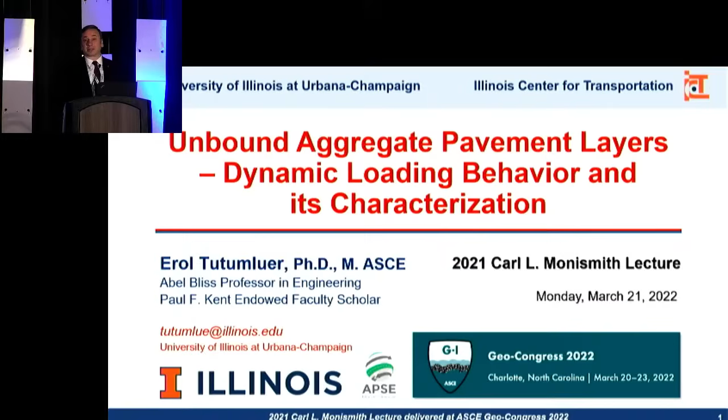With that, it's a great honor for me to stand in front of you and to present the 10th Carl L. Monismith Lecture Award today. Indeed, especially it's important for me to be here in front of you after Professor Carl Monismith himself, in 2012, presented the first lecture. This is the first time at a Geo-Congress venue that I'm actually presenting this award.

And you will see that I go back to my roots in geotechnical engineering with close ties. Those close ties really relate to some of the shallowest foundations of pavements, as unbound aggregate sub-base layers, which is something I've been working on since I started my PhD work at Georgia Tech. I really owe it to Geo-Congress 2022 for allowing me to actually present this lecture award at this time. Thank you again to the organizers, and thank you to the technical committee for nominating me, as well as the board of directors with Geo-Institute.

I do a lot of pavement work I will talk about today, but I'd like to also mention to you one logo on this title slide, which is the Academy of Pavement Science and Engineering, established with the goal to educate, to give higher education to people, to make them realize that pavement science and engineering is a field we need to learn more about, because, again, it is the shallowest foundation after all.

And from that perspective, I've done a lot of work with Illinois Center for Transportation, and you will see that my slides will come up. So let me switch to using this right here, hopefully.

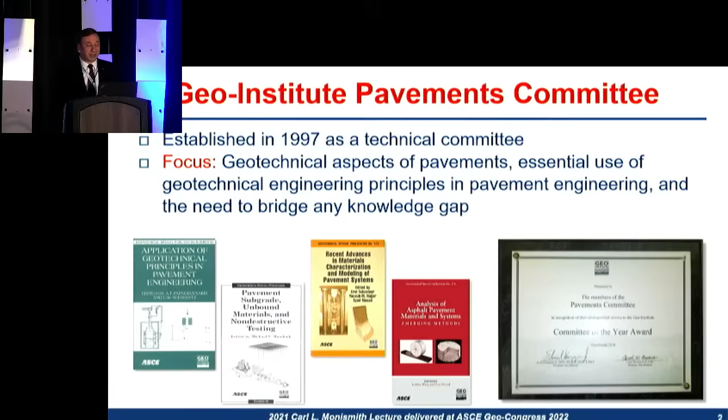I think we've been quite involved in doing things. Even in 2010, the committee won the Committee of the Year award, which I was very happy to have during my time chairing the Pavements Committee.

Another thing that made me extremely proud at that time, towards the end of 2011 or so, was when we established for the first time a named lecture, the Carl L. Monismith Lecture series in pavement engineering here by the Geo-Institute.

Professor Carl Monismith is a legend in our field. He's a distinguished member of ASCE, a National Academy of Engineering member, and served on the faculty of Berkeley, University of California, more than 50 years. His first talk on the Monismith Lecture was exactly on flexible pavement analysis and design, a half a century of achievements.

So he's the one who pioneered the mechanistic approach to flexible asphalt pavement design. I was there in that moment because with two other colleagues, Professor Tom Papagiannakis and Professor Chuck Schwartz, I indeed worked hard to make that award possible during that time. It's such a proud moment now.

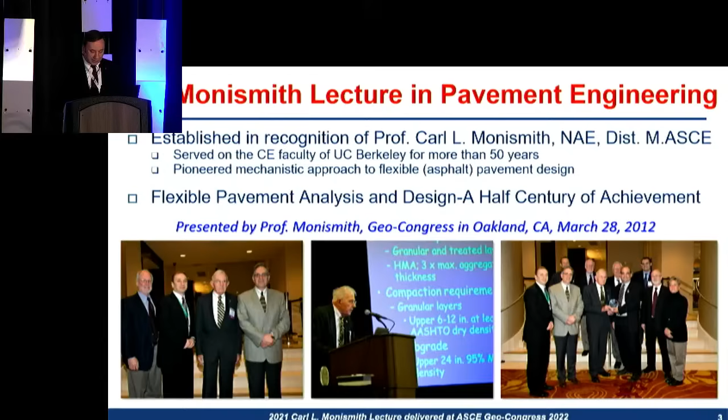I'm giving you this lecture because I was there to listen to Professor Monismith's lecture back in 2012 at the Oakland Geo-Congress event. It was a fantastic lecture, as expected, and especially students Dr. Gary Hicks and Dr. Rita Leahy were very influential in bringing and getting the support for his lecture establishment. I would like to mention that. So he's certainly a legend, and he was the person who gave the first lecture in this series in 2012.

Just a quick look at deserving, highly accomplished people and legends in our field of pavement engineering. Professor Bob Lytton from Texas A&M gave the second one. Professor Marshall Thompson from University of Illinois gave another; many of you know him very well.

Professor Matt Witczak, another legend and name in pavement engineering, unfortunately passed away just a couple months ago. That was a tragic loss, and my heartfelt condolences to his family and friends. He gave the fourth one from Arizona State University. The fifth was given by Professor Dallas Little, again another deserving individual from Texas A&M University. I introduced him actually at that Chicago event, I remember.

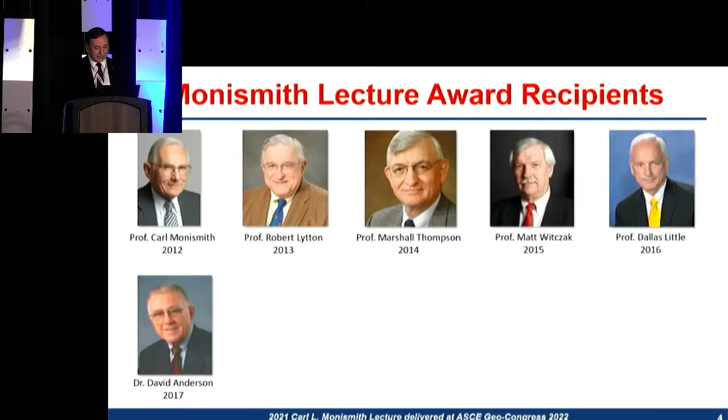Dr. David Anderson from Penn State, who's done a lot of work on asphalt, especially Dr. Gary Hicks—I will mention about him again, a student of Professor Monismith's. Tom Papagiannakis, University of Texas San Antonio. And finally, the last one was given by Professor Chuck Schwartz of University of Maryland.

Now I'm giving the 10th one, and we already have an 11th one for 2022. Eyad Masad, Professor Masad, is here with us. He's also from Texas A&M Qatar University. We're looking forward to his presentation next year.

A little bit about myself. I said I have strong geotechnical engineering roots and background here. Indeed, I did all my PhD work and graduate studies at Georgia Tech. Dick Barksdale, Professor Dick Barksdale, was my advisor, who was actually a student of Professor Jerry Leonards', another legend in geotechnical engineering at Purdue University.

And even going back further in the academic family tree, Professor Ralph Fadum, who was there for a short time, was also an advisor of Professor Jerry Leonards', who moved from Canada to study at Purdue at that time. But eventually Dr. Ralph Fadum was a professor at North Carolina State, right here in this state. And he had education received from Casagrande and Terzaghi at Harvard University. So really, that puts me in that chain, and I'm very proud of that.

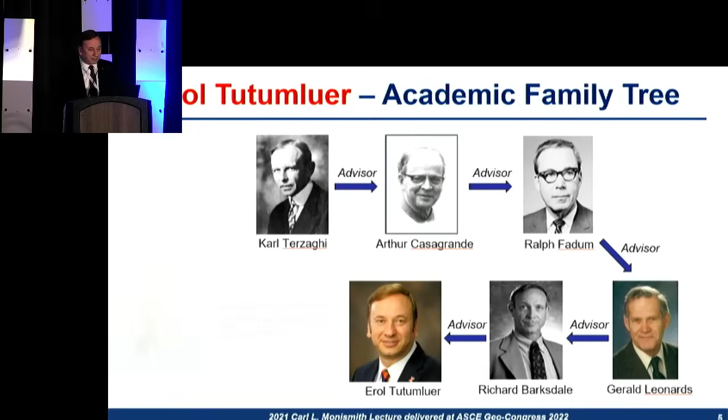The moment that I first attended in 1994 as a grad student, my first Transportation Research Board meeting, that was a really life-changing moment for me, because that conference is when I met for the first time Professor Carl Monismith, that's what really got me into academia. I can tell that was really the moment for me, yes, I want to do more of this, doing research and studying and educating students. So that's why I have to mention it.

After 2012, I went on the international front, and I became chair of the Transportation Geotechnics Committee affiliation and related work with the ISSMGE. Since then, I've been serving as the chair of Transportation Geotechnics Committee, TC202, under ISSMGE.

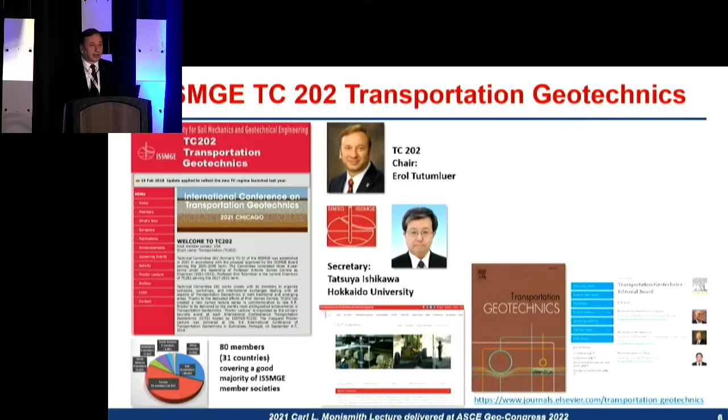As part of that, we started a new journal in 2013 on transportation geotechnics. I think it's got into the citation index, and it's really making some good impact to our profession and engineering field in transportation geotechnics. I was also the person who organized what unfortunately became a virtual conference, meant to be in Chicago back in May 2021, and that was the fourth ICTG. I know we have an ISSMGE conference coming up in May.

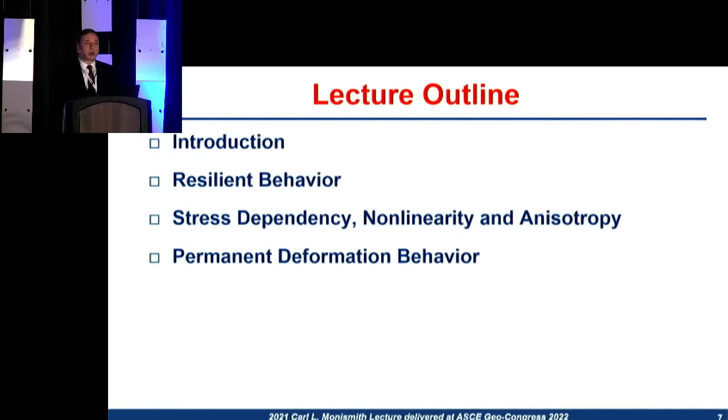So without further ado, let me get into my primary technical topics. I would like to bring to your appreciation some of the important facts and challenges we deal with in pavement engineering. My title has to do with dynamic loading, repeated loading, and vehicular traffic loading, and indeed what that does to our foundation materials and pavement materials, and how we take into account their resilient or elastic behavior and permanent deformation behavior by understanding proper advanced characterization of their nonlinear, stress-dependent, and anisotropic behavior.

All the things that are supposed to be there for doing a proper job analyzing pavements, the layered pavement system, moving wheel loads, not currently emphasized but very important. I will get into those aspects, you will see. And nowadays, more and more recycled material use, sustainability challenges, climatic effects, and resiliency, how we can build pavements to last with the aspects that we want to preserve resources.

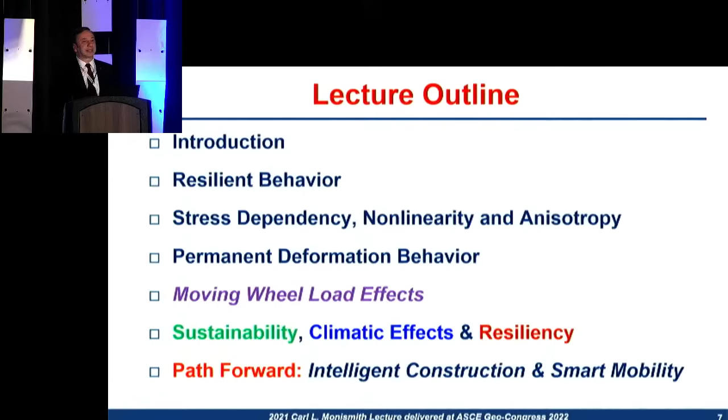Path forward, we're getting more into Mobility 4.0, you've probably heard about that term, intelligent construction, smart mobility, and I will also give some highlights about those towards the end.

To start with, have you ever thought about why Roman roads lasted that long? They built about 53,000 miles of roads 2,000 years ago, and about 360 miles of roads still exist today. When you look deeper into that three to five feet thick Roman roads, you will find different sized aggregates put together to build a road, a lifeline that we drive on nowadays.

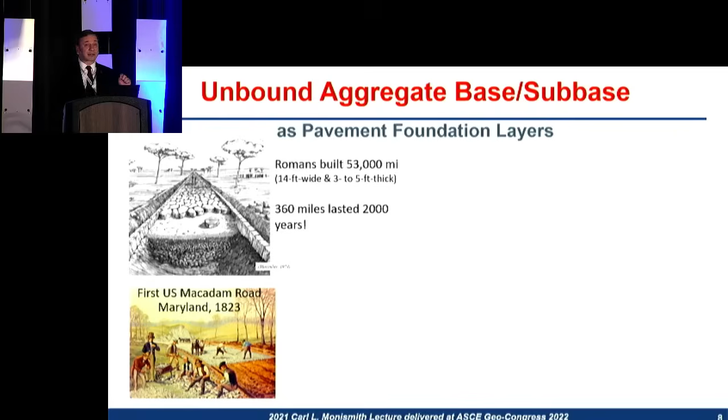The same thing was the case when the first macadam road came to the United States in Maryland in the 1800s, right here. Same thing, see how they're incising and putting rocks together. These are the aggregates, our stone skeleton infrastructure materials, building blocks.

Recently, in 2013, we did an NCHRP, National Cooperative Highway Research Program, synthesis on unbound aggregate pavement layers, and it was quite interesting. As expected, over 90% of flexible pavements, these asphalt surface pavements, have granular layers. This number goes up to 70% in the case of rigid pavements, meaning we built with unbound aggregate layers, as you see from these statistics, all the time, except for some of the high-type pavements. More than 90% of the 4 million miles of roads in the United States will have these unbound aggregate layers.

Understanding their behavior really helps us build long-lasting pavements. That's how throughout the activities of the Pavements Committee over the years, starting from the late 1990s, we put emphasis on geotechnical aspects of pavements. This is a Geostrata article from 2016 that Drs. Barry Christopher, Chuck Schwartz, and I co-authored, which shows the AASHO road test many of you are familiar with, and unfortunately, many of you are familiar with that cookbook formula that comes with the structural number equation. There's much more to pavements than that, believe me.

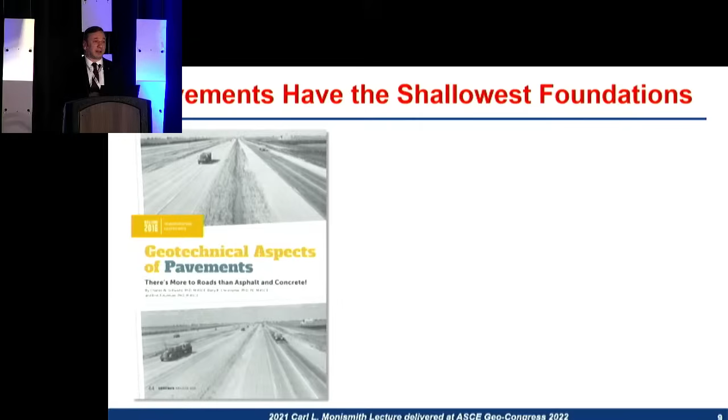It is not an easy thing building pavements. In fact, when you think about multi-layered pavements, just like a conventional flexible pavement you see here with the typical unbound aggregate base and subbase, and how to make it both drainable and packed, optimum packing with large or small or different sizes of particles to distribute the load, how to make that actually last. We are indeed, as pavement engineers, designing something to fail in a certain number of years. You don't do that in any other job, you don't build a steel structure to fail, to kill people at some point, right?

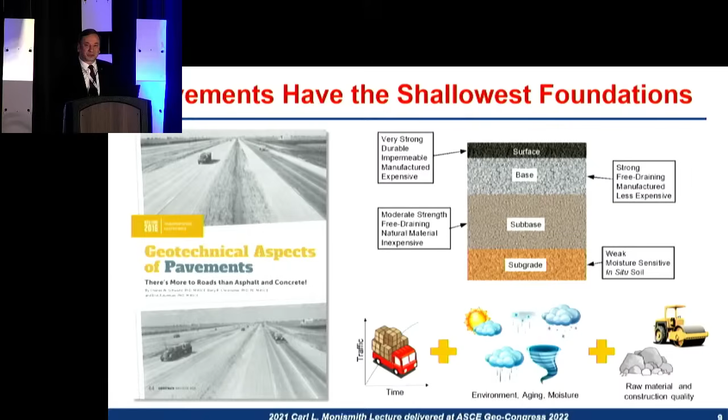Roads are failing on a certain time frame, they have a time life basically. It's really challenging when you think about the dynamic loading aspects, the climatic conditions, environment, moisture and temperature changing on you all the time, and of course the construction aspects, hoping that you're constructing what you designed.

Flexible pavement is an asphalt surface pavement. Load distribution in those aggregate layers is very important. Modulus, stiffness, resistance to permanent deformation, all those things you have to pay attention to under a dynamic loading scenario when you're constructing them.

In the case of rigid pavements, these are often jointed concrete pavements and slabs. The slab action, the slabs are very stiff, maybe an order of magnitude stiffer than asphalt concrete surface. So more the focus in unbound aggregate layers goes to some of the moisture affinity and drainage aspects, looking at their moisture, whether or not they're susceptible to moisture effects, the suction potentials, their hydraulic conductivity properties. That's what we should be paying more attention to.

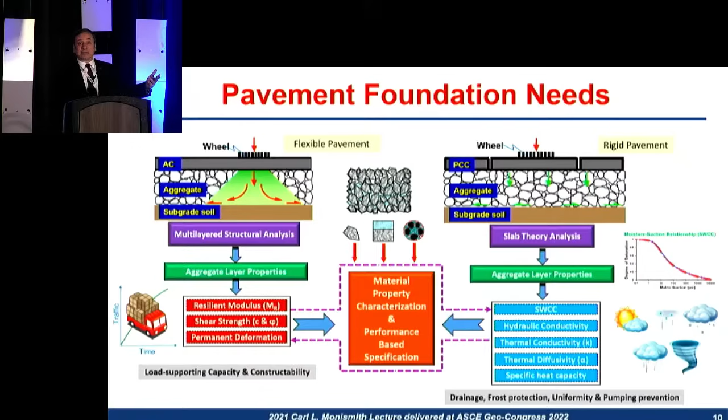That all comes back to these particles put together as unbound aggregate layers, an assembly, which just like our soils have three-phase material, voids, how much of the voids filled with water. We need to be engineering these such that eventually the roads will perform and not deform and not rut, and they will still be able to freely drain and all those aspects. So it's really a challenge.

And in all this, the design objective is the surface that you're driving on is still supposed to provide for you a smooth, safe and durable riding environment. That's eventually the design objective.

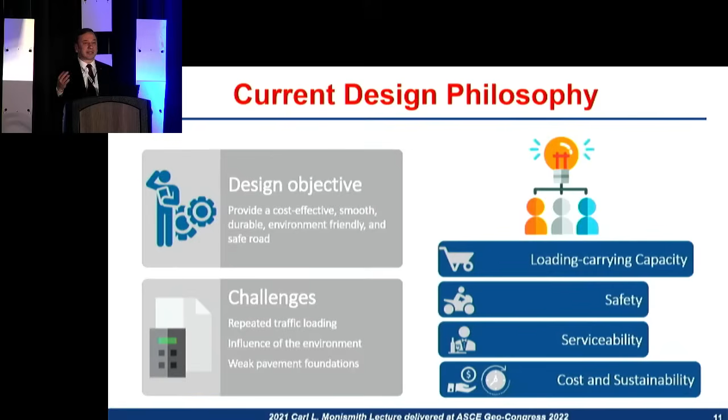But don't forget about the challenges of constantly moving vehicular loads, sometimes heavier than what is expected on a certain road, the effects of moisture and temperature and seasonal changes, as well as extreme events we'll talk about, weak pavement foundations—that's where we come in. Again, load carrying capacity, safety, serviceability, more and more these days sustainability aspects, and the permanency, resiliency that comes with life cycle cost estimation into the picture.

Most of the time, when you remember the empirical AASHTO equation, the structural number—that's how everything goes back to the 1960s AASHO road test, but so much has changed since then. So we need to really design multi-layer pavements by understanding the mechanisms about how they deform and how they fail. And understanding those mechanisms requires the right inputs: the traffic loading, the climatic factors, temperature, moisture regimes, as well as the construction aspects.

We need to bring them all together. We need to solve the multi-layer structure, how the various layers coming together are going to take the load, and what are the responses? Usually stresses, strains, deformations—these are pavement responses.

What is a critical pavement response that's going to cause cracking, that's going to cause rutting? Which layer is rutting? You need to understand these mechanisms to eventually relate them with the number of load accumulations, how damage accumulates. These are distresses like alligator cracking, fatigue cracking, or roughness of the pavement surfaces, or rutting in the wheel path.

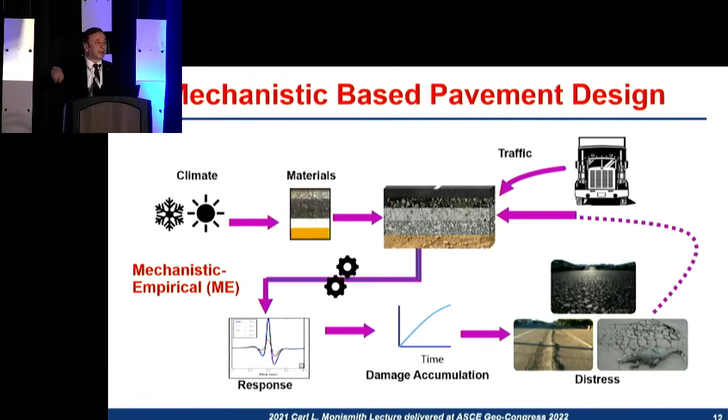And this is a process we call mechanistic empirical design as the state of the art. We need to really understand this. Well, understanding this and perfecting this really relates to going to a level that you need to characterize the right stress states.

You need to apply the right kind of loading scenarios and conditions in the lab on your samples and specimens you test and analyze. That's the lab testing level.

You need to do field trials. Well, field trials will not probably complete so many truckloads, so much traffic that you will accumulate in the 20-year design life of that pavement. You need to actually accelerate that performance period, maybe doing accelerated pavement testing in the field, full-scale construction of those pavements, and the modeling, the right modeling by understanding the mechanisms. So that's all what's needed.

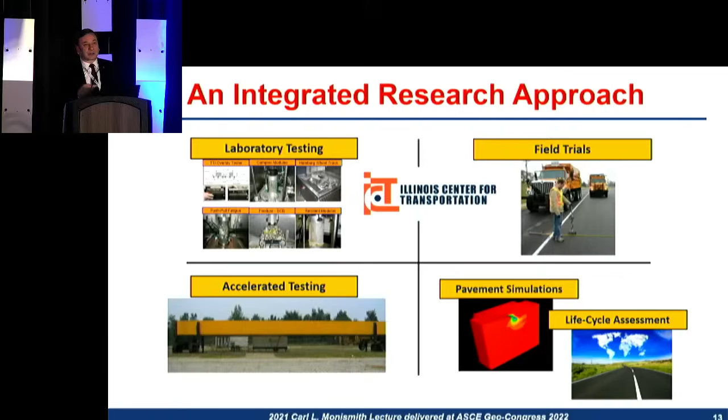In all of this, of course, performance is a must. It must be satisfactory to come up with your guidelines and specifications for construction.

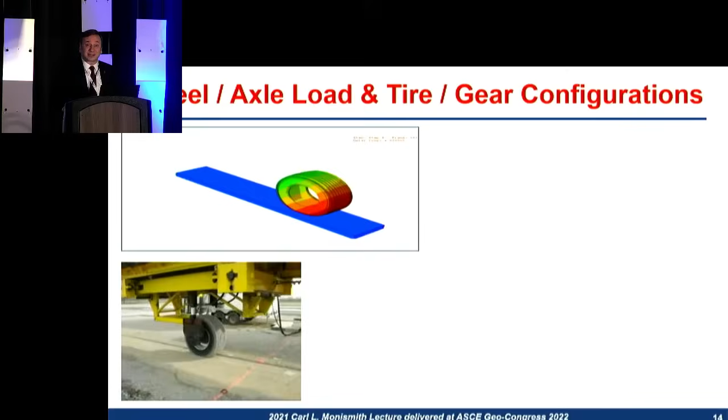Now, think about this as a single wheel traversing over, in this case, an aggregate layer. Often these are construction platforms, and understanding the type of contact stresses in the vertical direction, longitudinal, transverse directions. And what if you go from a standard dual wheel or single wheel to a wide base tire? What are the implications of those on a pavement surface?

And this is just a single wheel. Think about it now.

These are 13 vehicle classes of the Federal Highway Administration. These are all the different trucks, buses, cars, all the vehicles you see out on the pavement, right? How do you take this into account? How do you accumulate traffic? How do you look at effects?

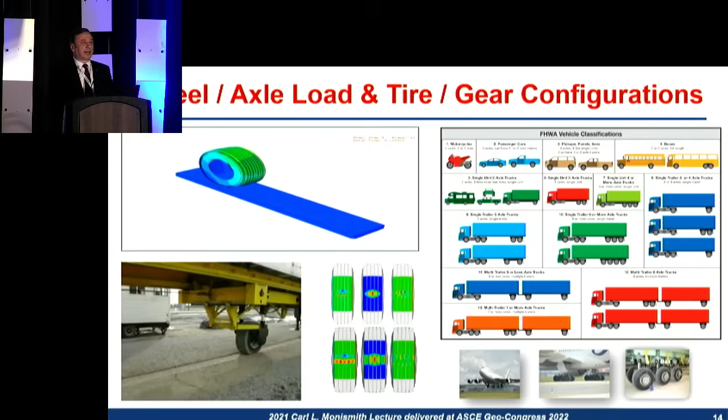The same thing is in the case of airfield pavements. How do you look at closely spaced many wheels, actually applying a very heavy load from that wide-body aircraft? Really challenging. And all in all, again, this is a moving wheel load aspect.

So nowadays what we do is, some of you may have heard this, weigh-in-motion stations, usually in states. That's where they collect the data, and that easily goes back to a mechanistic empirical design approach where we take into account every single axle and the load coming from every single axle wheel arrangement. That's how axle load spectra are established.

But there are other things that we have to worry about on the surface, from the point of road alignment, pavement friction, hydrodynamic forces that affect the vehicle control, and how all of that comes into that vehicular stability. So there are things that are really complicated dynamic loading. It's not earthquake loading, but this is another dynamic loading, right? We are challenged here in geotechnical engineering, pavement geotechnics.

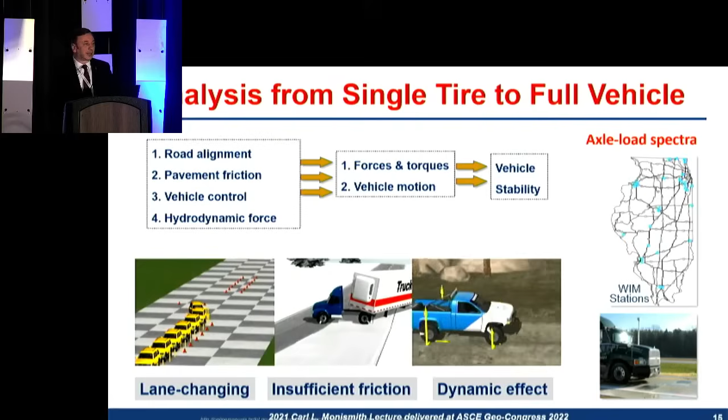So in all of this, state-of-the-art goes to your three-dimensional finite element programming. Professor Al-Qadi, my colleague, director of ICT, does a great job taking into account some of the really advanced topics. For example, viscoelastic properties of asphalt, characterized properly in the lab. I joined with him by actually looking at base and subgrade materials from databases like long-term pavement performance studies. But looking at where the rubber meets asphalt.

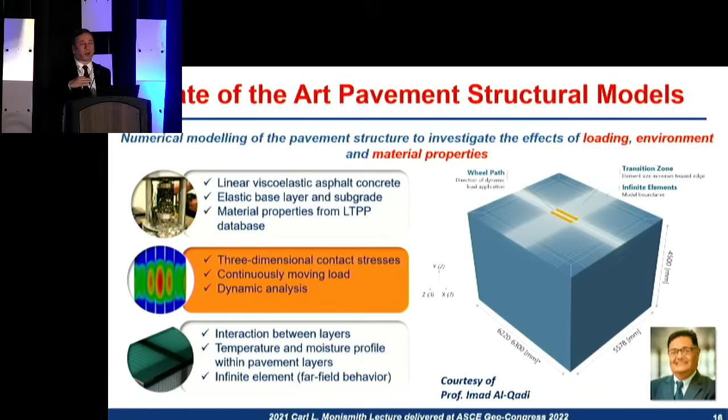Exactly, we need to understand that contact stresses, moving load effects, how load is transmitted, and how multiple layers are interacting with each other, any delaminations, any interface stresses. Of course, all those things we assume perfectly bonded and perfectly fine, perfect conditions in most of our analyses. But again, that's something state-of-the-art.

When you come and look at the aspects of under that surface course, under that asphalt concrete, flexible pavements, low to medium volume roads, thick airport pavements with thick granular layers, always load stress distribution is the key, as I mentioned before. And load has to be distributed because subgrade is the weakest component. You want to protect it, right? That's the whole idea. So layer modulus is a design input.

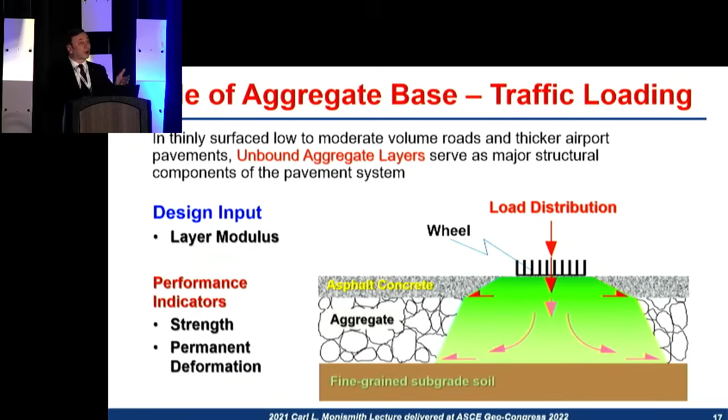That's how you solve for pavement responses. Strength and deformation need to be there because that road and that unbound aggregate layer should resist the effects of multiple repetitions of a certain truck passing on that road. Again, dynamic loading aspects. Let's get into the shallow foundation domain and understand the typical stress states under a wheel.

We're very familiar with this. There's an overburden load right on that, and if you look at a certain soil element or aggregate element in that base course, typically you are confined in a confined medium, but not a lot of overburden we have. The only thing that comes as dynamic is usually that wheel loading.

If you put the wheel right on top, there are things you can do like jump up and down the wheel, but that's not the fact. Wheels are moving in nature, but somehow there is some dynamic impact loading that may take place. You need to take into account all of those things.

That's how the repeated load triaxial tests are designed to evaluate dynamic traffic loading effects on typical triaxial specimens, which as geotechnical engineers we commonly run these tests on. But this is different from a cyclic loading test because in between the different wheels, axles of a truck, you have some wait times, rest periods. So that's why it's called a repeated load. We always have a rest period in between, waiting for the material to bounce back. And indeed, that's very important, that bouncing back.

This is the only video that I think I have not worked very well. The material, the specimen that you see in the picture is supposed to be going up and down with the wheel passing on top. That's exactly the recoverable deformation or the unload behavior, the elastic deformation.

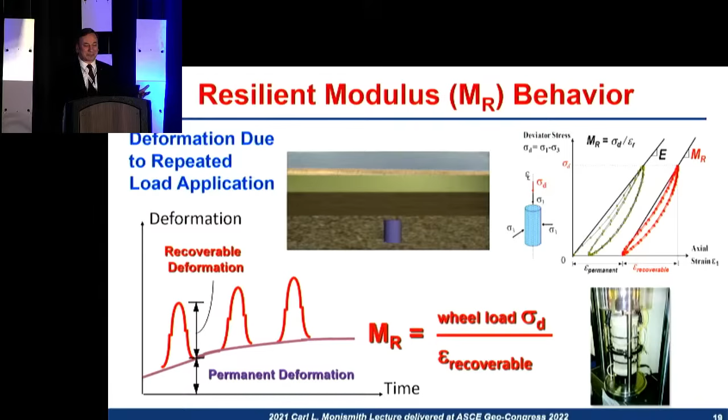There's a permanent deformation that's accumulating in time, and you can clearly see that on the lower left picture. You want to make sure to accumulate that up front before you open the road to traffic during construction. That's the idea. But anyway, dynamic loading, deviator stress divided by recoverable strain, that's your modulus.

We typically run the AASHTO T307 test in the US to get this, and this is basically the resilient modulus test procedure that came out of the Strategic Highway Research Program protocol. Also, NCHRP study 1-28 brought us some special aspects that Europeans are already using, which is taking into account moving wheel load aspects.

With a moving wheel load, you get variable confining pressure conditions. The load is moving already, the load is not stationary. So as I differentiate these triaxial setups, if the cell pressure is constantly applied, that's a constant confining, versus variable confining would represent a moving wheel.

Typical standards, the European CEN norm for example applies that, and other countries in Europe can apply that too. We need to be doing more of that. Whereas in the US, from a 2013 synthesis, we found only 4 states run even the T307 procedure in their DOT labs. So interestingly, it's just the T307 or the 1-28A.

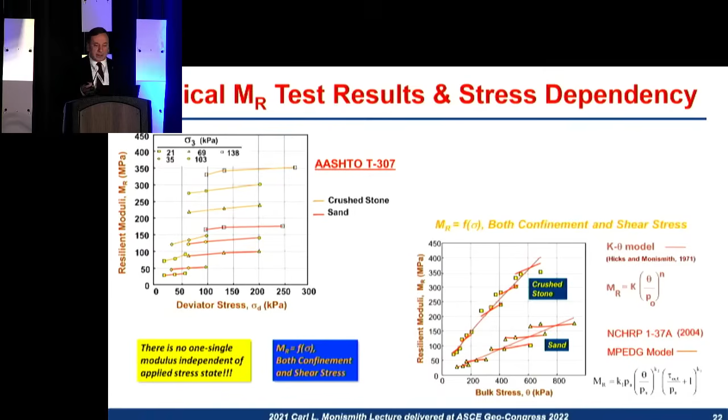Actually it's both dependent on the confinement, or we call it first stress invariant bulk stress, as well as the repeatedly applied wheel load stress. So clearly this aspect was first picked up by Professor Carl Monismith and Dr. Hicks in their 1971 paper, and this is the very well-known K-theta model.

But in addition to that, Professor Jacob Uzan and others came up with the effect of the deviator stress that should be taken into account here as well. And eventually this formed into a 3D stress space, the MEPDG model as we call it. Tau octahedral stress was included into this model, and that's the work of Professor Chuck Schwartz. This is the famous MEPDG model that came into the Pavement ME AASHTO design, supposed to be a level 1. So that's the stress dependency we're talking about that we need to take into account in our analysis.

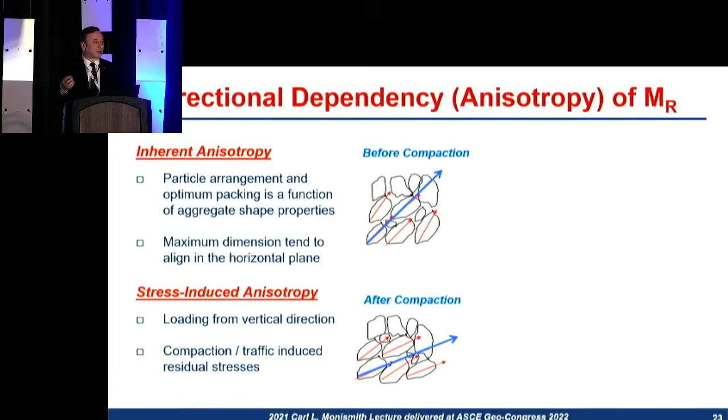The second thing that's most important, and over the years we found this to be truly important - my early work at Georgia Tech, we started looking at that in my PhD - aggregate materials, granular materials, accumulating in the vertical direction, sedimentation, think about it. They're already having some of the longer dimensions oriented in the horizontal direction. That's what we call inherent anisotropy. But imagine the compaction and vehicular loading coming always in the vertical direction, that's further causing an anisotropy, related to a stress-induced anisotropy.

If they're independently controlled, you can come up with any kind of dynamic stress state, typically under a moving wheel. Or you can just cycle in one direction and test the material, then change the pulsing direction completely on a compacted aggregate specimen, which you should.

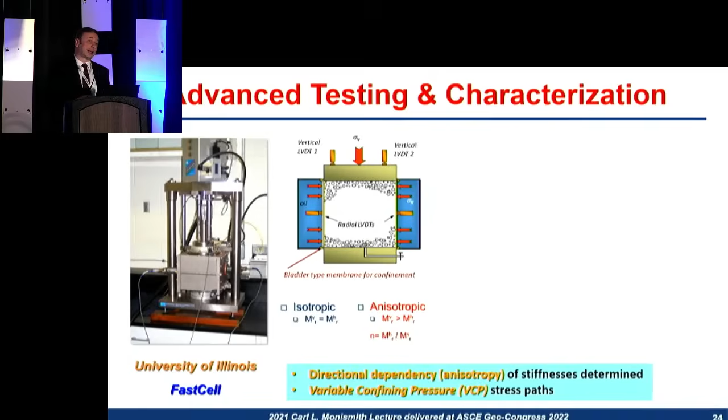Professor Jerry Leonards, early in his career, was able to orientate specimens 90 degrees to look at anisotropy in clay samples. But with unbound aggregates confined, you can't do that, so you need to switch the stress states around. That's exactly how we were able to test for anisotropic modulus properties. That's what this device allowed us to do.

It also allows us to apply various dynamic stress states under a moving wheel load. We call it variable confining pressure stress paths and stress path testing. All these things are important.

First on anisotropy: in 1999 we looked at the first aspects of switching the pulsing direction on a specimen, running isotropic stress strain equations. Whichever direction you're pulsing from, if the material was isotropic, like a neoprene rubber specimen we tested, it's not stress dependent, and from either vertical or horizontal pulsing it gives you a constant modulus.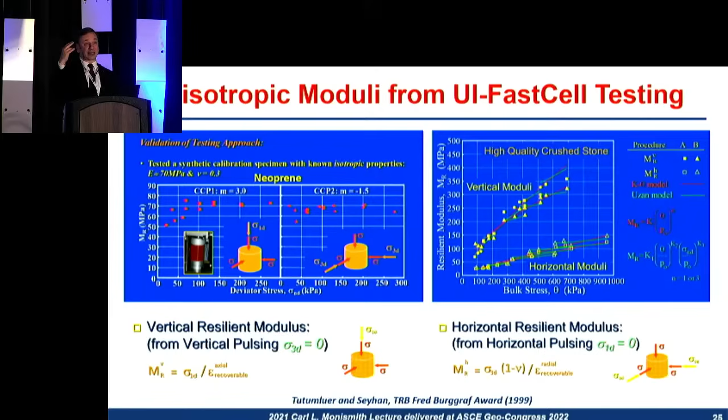That's a perfect material, rubber. But nothing like that is our aggregate materials, especially compacted out in the field. There's always a higher modulus attained in the vertical direction than the horizontal direction. The horizontal to vertical modulus ratio is the anisotropy we always talk about, and this is something we proved.

Further work on that—I was really fortunate to work with two great lecture award winners, Professor Bob Lytton and Dallas Little, whom I respect utmost. Our work through the International Center for Aggregates Research brought out aspects of the stress dependency for the vertical modulus, and in addition, how we were able to characterize this anisotropy of the modulus.

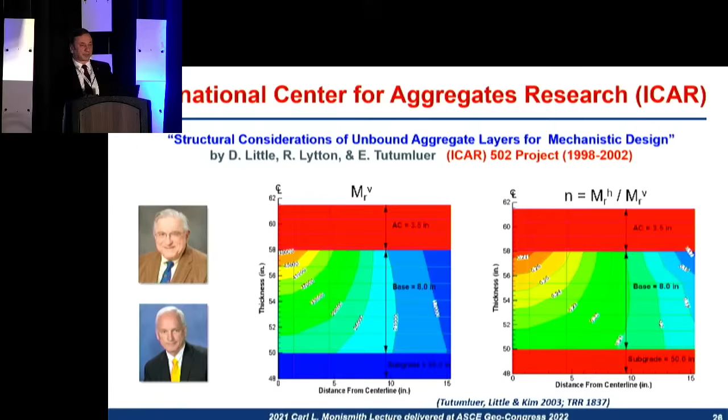Typically about a quarter of the vertical modulus, we found, stress dependent, in the horizontal direction. If you take into account the proper anisotropy of the material as it's compacted, then it's possible to do a much better prediction of pavement responses in your analysis.

Some proof of this: Professor Stokoe from Texas went to a Morgan County haul road, a quarry road that was constructed, and did seismic testing measurements on a constructed aggregate layer, vertical versus horizontal. You can clearly see that. This was published back in 2003. Vertical is higher as constructed in the field.

Professor Eyad Masad, with family members who worked on this, analyzed the AASHO Road Test data for some of the measured deflections to match our models—should it be anisotropic, or isotropic, giving us the best results? When he tried isotropy, not really—measured versus predicted don't match on the 45-degree line. When we go all the way to horizontal modulus being 30% of vertical, that's when we get the match.

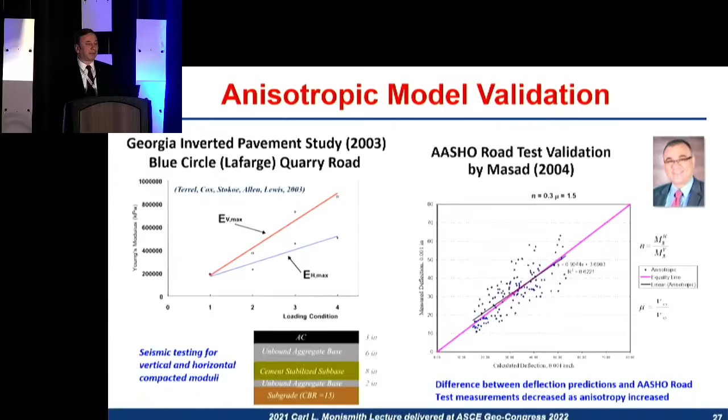This is something from actual field data as validation of the anisotropic behavior. Further on, in 2007, we did similar validations with test sections we constructed at Illinois, with different thicknesses of base courses tested under moving wheel load conditions of ATLAS, with 170-plus instruments put in as strain gauges and LVDTs for deformation measurements.

If you look at those individual responses collected and predicted from our analyses—this is Dr. Kwon's work, really—you can clearly see that predictions with the anisotropic assumption work much better across several of those pavement responses predicted at once. If you can match so many of those at the same time, that tells you you're probably getting the mechanics of how pavement is deforming. So this is really a great indicator.

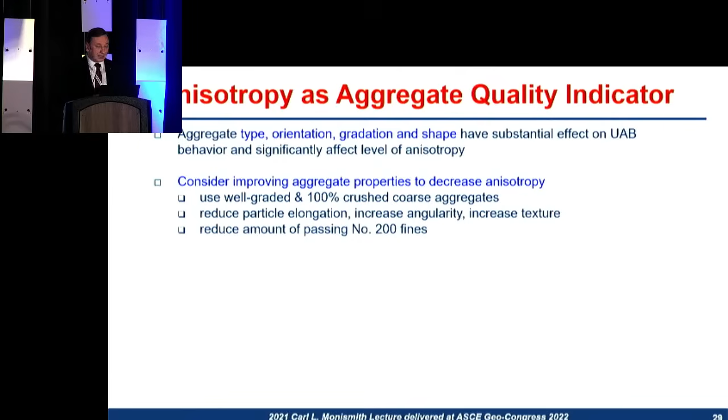From that perspective, anisotropy is certainly a quality indicator. We've told this to aggregate producers, construction managers and site managers on how to select their aggregates. As aggregate material gets better quality, with more crushed material and better gradation of optimum packing, dense graded, you can clearly see that N number, the horizontal to vertical modulus ratio, goes up towards isotropic, making the material stronger. What that does is affect critical pavement responses, such as the strain at the bottom of the asphalt responsible for fatiguing of the asphalt.

Vertical strain or vertical stress, wheel load stress on top of subgrade, controlling subgrade rutting - these are all actually coming down as the anisotropy is getting better. That means the isotropic assumption is not conservative, by the way.

This is really something we use all the time. There are effects of percent crush and percent fines on the modulus. As you get higher crush versus uncrushed material, crushed material usually interlocks better and gives you much higher modulus - that's what you see on the left-hand side. On the right-hand side, you're seeing how much fines passing the number 200 sieve should be in my dense graded aggregate base.

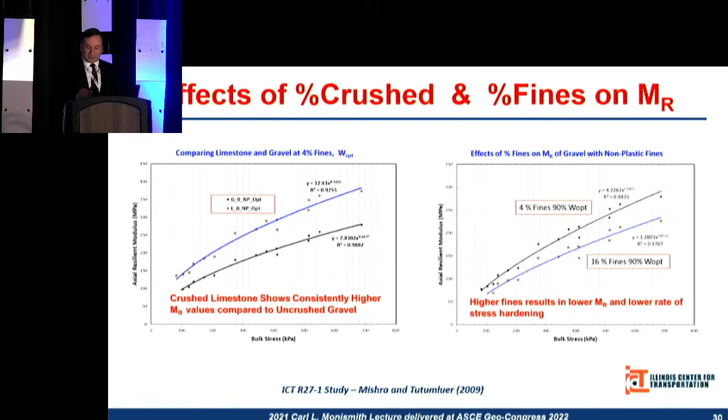Very important question. When you start increasing those fines, you start to compromise the large aggregate contact and the skeleton, the stone-on-stone contact, right? You can clearly see that modulus also goes down with excessive fines, in this case up to 16% fines. Now on the crushed aspects, crushed versus uncrushed, or rough surface texture versus smooth surface texture.

Two decades of my work, including Professor Masad's work here, we looked at how we can quantify with indices from imaging, image analyses, aggregate shape properties - instead of saying angular or subangular, how can I come up with an angularity index, how can I come up with a surface texture index? This is the aggregate image analyzer developed at the University of Illinois that can do that for you. Why is quantifying important now?

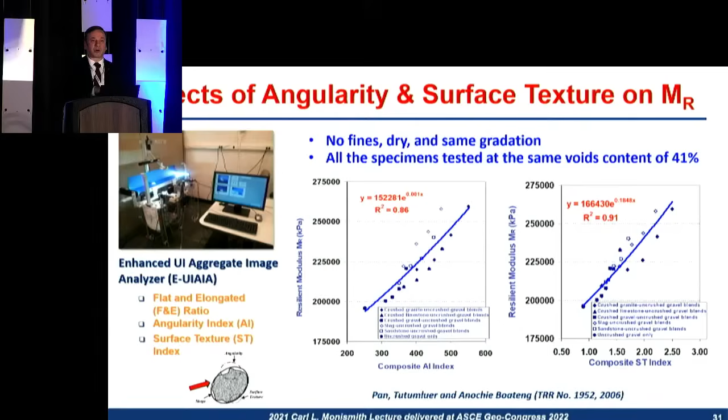Because you can relate it to modulus, permanent deformation, some of these aspects. You can clearly see that resilient moduli here is shown as a function of a composite AI angularity index or composite surface texture index of different blends of crushed and uncrushed materials. You can clearly see that as you go higher in angularity, as you go rougher in surface texture, you're always increasing your modulus. It does a better interlock.

Now let's come to moving wheel load topics. A state-of-the-art facility constructed at the beginning of this millennium is the Federal Aviation Administration's National Airport Pavement Test Facility, where they can put actual gear loads of wide-body aircraft, like a Boeing 777 or 747, and test full-scale pavement test sections.

When we looked at some of the data, I was fortunate to be able to analyze some of their data and look at the results, using all the different theories to predict the stresses and all that. How does that compare to what current test procedures allow us to characterize modulus, right?

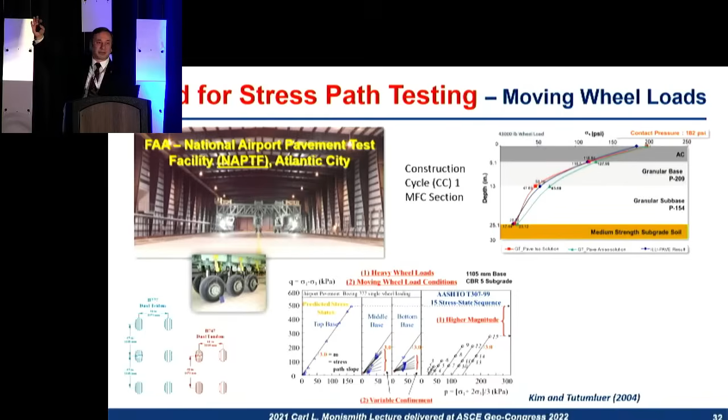First of all, heavier loads like gear wheel loads of aircraft are very high. If you look at the middle portion, showing the middle or the bottom of the base, you see not exactly a stress path slope of 3.0, which happens to be constant confining, but a variable confining, because moving wheel load aspects are important. Actually, that NCHRP 1-28A is probably the best in that case.

And surely, you can bring those aspects together in a moving wheel load scenario where you see, when the wheel load goes around, that the wheel load is not changing the overburden, but according to the dynamic loading, you see the orientation of the principal stress axis. And approaching and departing loads - think about how shear stress reversals are happening and how those have detrimental effects.

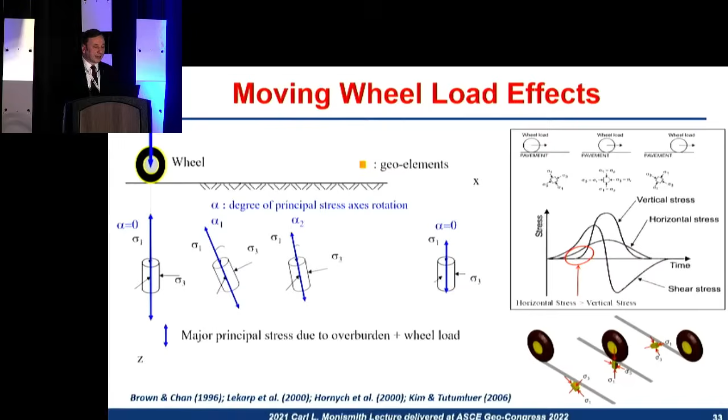Extension, compression, extension type loading. Many people have shown this over the years, and we need to take this into account - the principal stress rotations, through stress path testing.

You can do this by actually pulsing in different directions on a specimen and come up with the right stress states - all the way from just pulsing in the vertical, what we call the stress path slope, Q over P about 3, constant confining, to going pulsing only in the horizontal direction. FastCell-like devices or resonant cell can help us with doing this.

Why is it important? Simply, all the compression type loads that you see on the positive axis, the Q axis here, are given moduli often much higher than the extension states. Extension states are realized during a moving wheel load. Remember that.

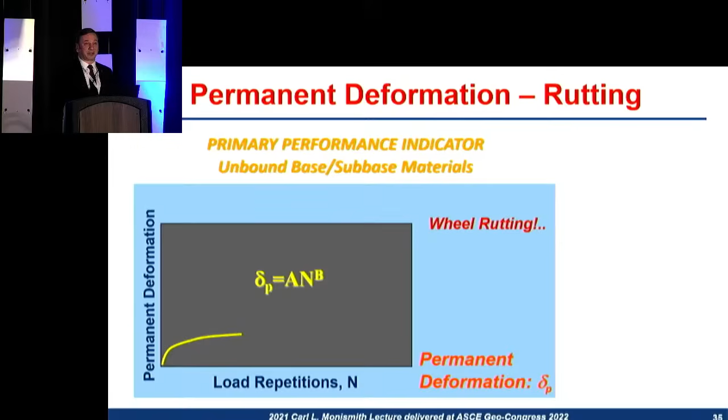Why is this important? Probably the most significant aspect is in the most important performance indicator of these layers, which is rutting, permanent deformation. Here is the phenomenological curve we are always familiar with - number of load repetitions of vehicular traffic passing. N is the number of load repetitions, and as N is increasing, rutting is increasing, and finally there's an unstable zone where you introduce some moisture maybe to your pavement, and all of a sudden it fails.

That's the kind of thing that was observed over the years, starting from the 1970s. And that phenomenological model relating to permanent deformation accumulation was thoroughly studied on aggregates first and presented in 1972 by Professor Dick Barksdale at Georgia Tech.

This was presented in his third ISAP conference in London, but it wasn't until 1975 when Professor Carl Monismith finally published this and gave this kind of permanent deformation model an expression. Truly, that expression is something we are using to quantify permanent deformation accumulation.

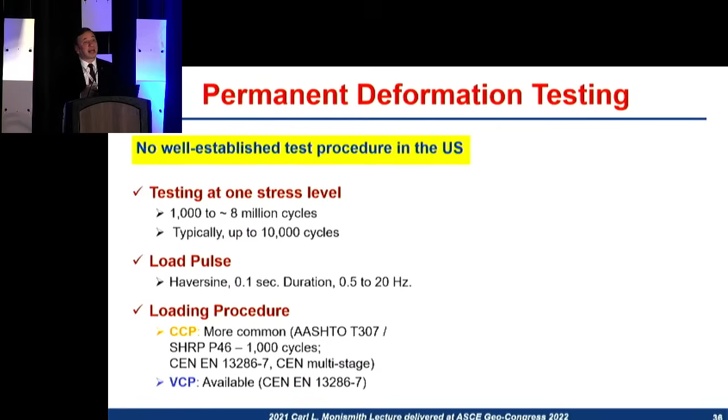However, more so in other standards, not the AASHTO or ASTM used here in the United States, we still have no well-established test procedure for testing the most important performance indicator of these layers: permanent deformation.

You can clearly see in a model like that, the first A parameter or constant really is responsible for - if you haven't done enough shakedown on your material during construction, you can accumulate very quick permanent deformation when you open the road to traffic. Whereas the other B exponent governs the rate of accumulation.

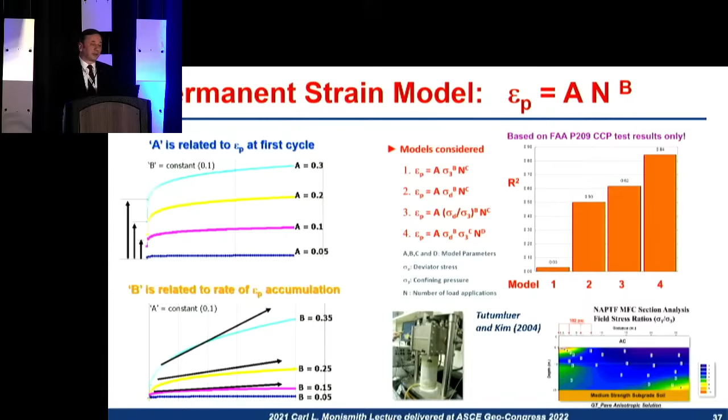But still, this expression doesn't have stress terms in it. We need to include the stress terms into the picture. That's where comes the work we have done over the years with FAA's materials. You can clearly see as you include both deviator and confining stress effects, you're reaching much higher R-squared in a model like that, so you need to take all of those into account.

One other person I will mention here is Professor Andrew Dawson from Nottingham. Beginning of this millennium, he's done great work on shakedown behavior of these materials. Clearly an A regime here is first accumulating during construction, and now you open the road to traffic - stable permanent deformation accumulation. That's how the road's supposed to last 20 years.

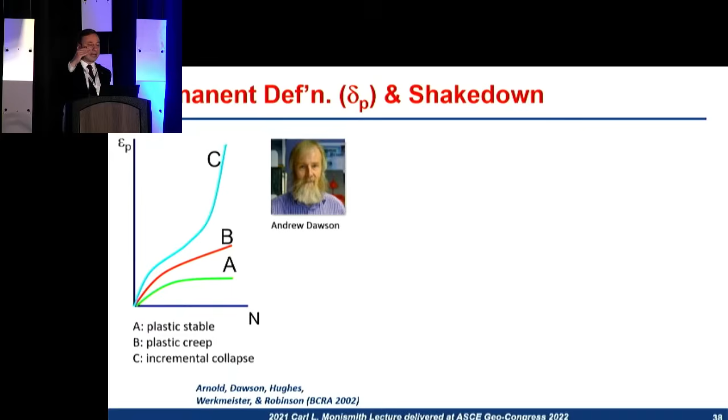Going into B and C regimes, you see there's plastic creep, incremental collapse. That's how proper compaction is very important on this material. You can put things into perspective on a Q-P plot as different ranges, typical A, B, C range behavior of these materials in permanent deformation.

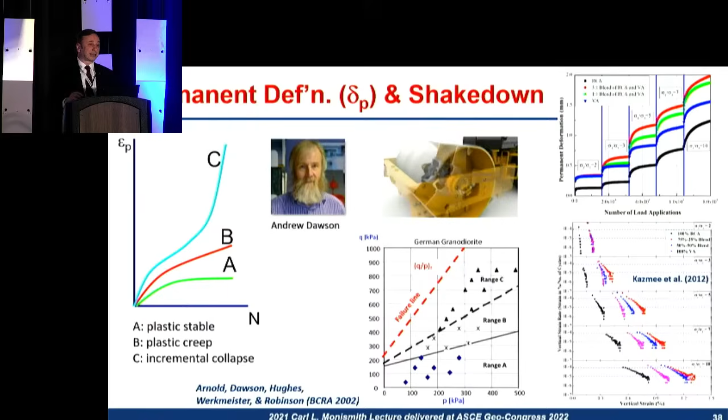What most Europeans do is follow a nice multi-stage testing protocol on the materials, which we have done in this case on a recycled concrete aggregate, which has the lowest permanent deformation, also looking at the rate of strain accumulation. You can see the next one in blue color is virgin material, so RCA is doing better than even the virgin material. But when you blend the two, you get the worst effect.

Now, there are more aspects about that, but this is the way to study the material - this is the way to incorporate stress states definitely in your permanent deformation accumulation models.

This is one we developed based on the simple Mohr-Coulomb law - the Mohr-Coulomb principle of basically understanding how and where you are in a shear stress, normal stress diagram here when you're about to fail a specimen, and when you're close to failing a specimen you accumulate so much more rutting.

So if you put a term in perspective here as a shear stress ratio, tau F to tau max - tau F is your mobilized shear stress on that failure plane, that's really what governs here.

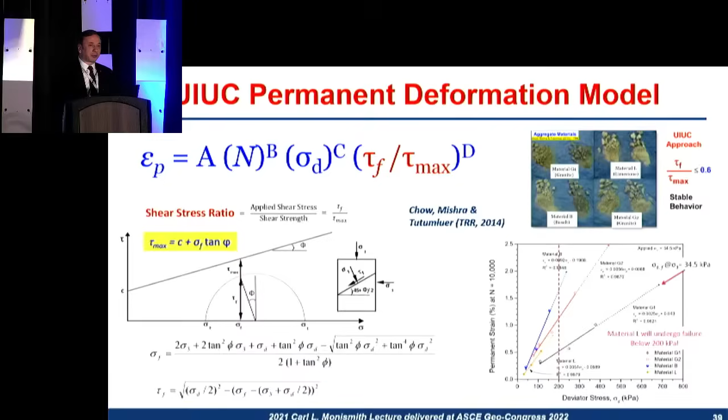As we clearly apply this technique to practical applications and implications - depending on your deviator stress you expect from typical wheel load stresses on a pavement, you can actually pick the quality of the material, whether or not that material used in a granular layer will rut or not. That's exactly the kind of approach I mentioned in this case. The rule of thumb is usually keep that ratio below 0.6 or 60%.

Now, on the moving wheel load effects, what do you expect? Is stationary loading on a specimen, like plate loading, or what we are doing with constant confining on a specimen in the lab, or a moving wheel load - which one will accumulate higher ruts?

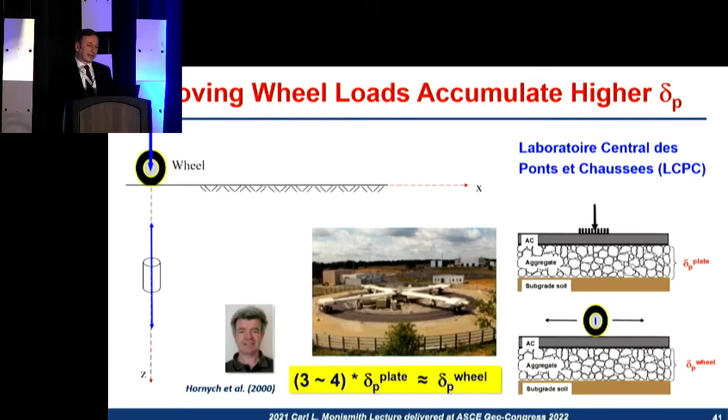Huge difference. Guess what? In the year 2000, the same thing came from the French. They have a circular test track and constructed the exact same granular base thicknesses. One is under moving wheel load around the circle, the other is plate load, with the same number of load repetitions. Guess what? The moving wheel actually shows 3 to 4 times higher permanent deformation. So this is a very important concept here.

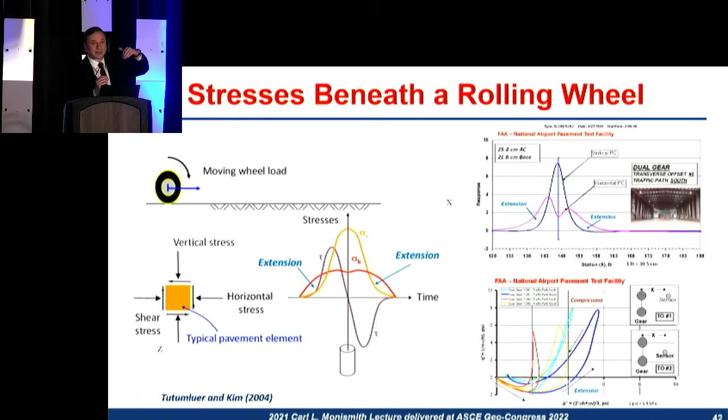In this case, we need to really take into account these stresses beneath a rolling wheel. When instrumented in a track like FAA's, you can clearly see there's an extension, compression, extension state on the vertical, horizontal, and shear stresses, right? It's almost like the same thing we have seen on a QP plot. These are actual measurements from a moving wheel load. You go into extension and come back on the positive compression side on the Q axis, and typical moving wheel load repeats this pattern.

That's something we never do. We only use compression loading in the lab, right? But when you take into account actually one pass of a wheel, extension, compression, extension loops, just like you see formulated in one of our papers, you can clearly see the accumulation of higher permanent deviatoric strains and volumetric strains. Again, this is very important, moving wheel loads.

One other thing that's very important in airport pavements, the different gear configurations of the planes usually have different points. There's a wander pattern, and usually a much bigger wander in airport pavement loading than highway pavement loading with narrow lanes. That's exactly what they've been studying in the FAA's facility, understanding how a large rut crater will develop in a wander pattern loading, and you can actually track that.

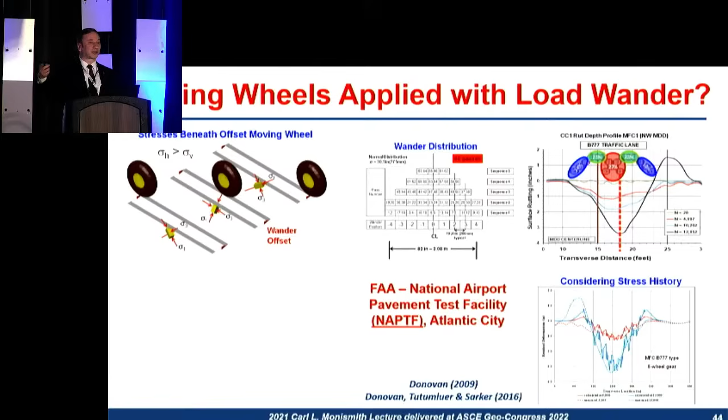In a study like that, we were able to look at the stress history effects and the shoving and pushing on the sides of different load locations as it goes back and forth. So we were able to actually predict some of those rut crater patterns.

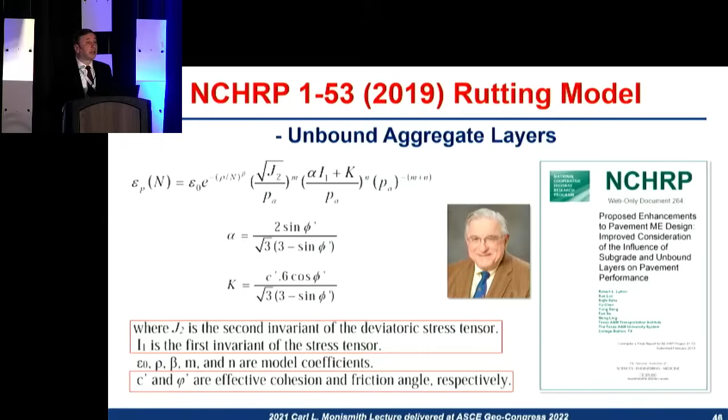However, no worries, there's a newer version of this with the latest work by Professor Lytton. Now he's actually put exactly what I talked to you about, shear strength and stress state effects, back into his equation, hopefully to improve things for us. So that's on a good note.

What if those stress states and strengths are not accounted for? Again, this is something where your aggregate base may fail in rutting, shear, base shear, rutting, right? And that's something you sometimes don't realize, but you can end up with this kind of a scenario.

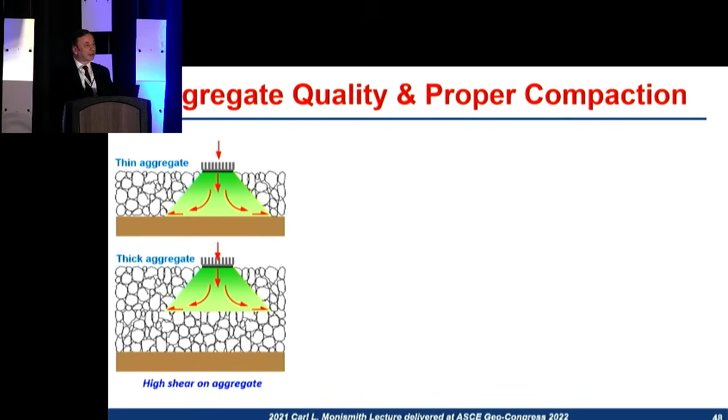So it's very important to do proper calculation of the aggregate quality, how thick you can go, and where your bearing capacity line fails, whether or not you're rutting these thick layers, and how that's linked to the quality of the material. Because friction angle, which is strength, is directly linked to crushed versus uncrushed, and it's not a 50-50 if you come up with a blend. You have to go to very high percentages of crushed to still be able to get the friction angles higher up, right?

Very important. Another thing is proper compaction, and proper compaction can be done very nicely on a stiff underlying layer. This is the famous South African inverted pavement design. That's how they can actually achieve compactions up to 105%, right?

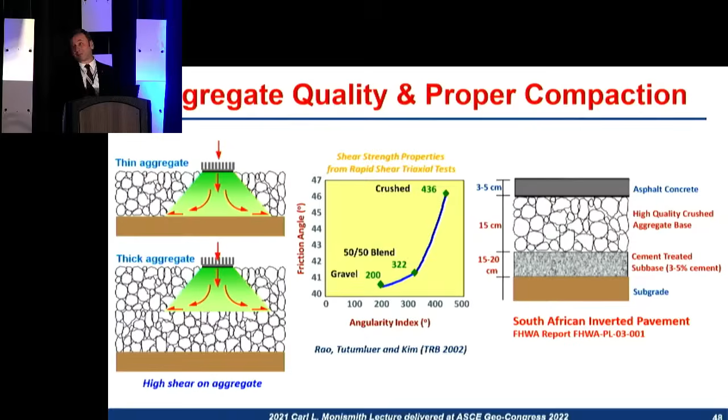One last thing: how does aggregate packing play a role? Well, aggregate packing or dense graded, people always associate that with the 100-year-old Talbot's equation, or Fuller curve as Europeans call it. But that usually gives you many different lines, and with the m value, the exponent, it's not that precise to allow you to make your material drainable and stable at the same time.

What we have found to give us much better insight, through all the optimum packing studies and collaborating with others, is looking at the primary structure, secondary structure in the aggregate skeleton, this gravel to sand ratio. It boils down to something very simple: what percent gravel you have in your gradation, and what percent sand fraction you have.

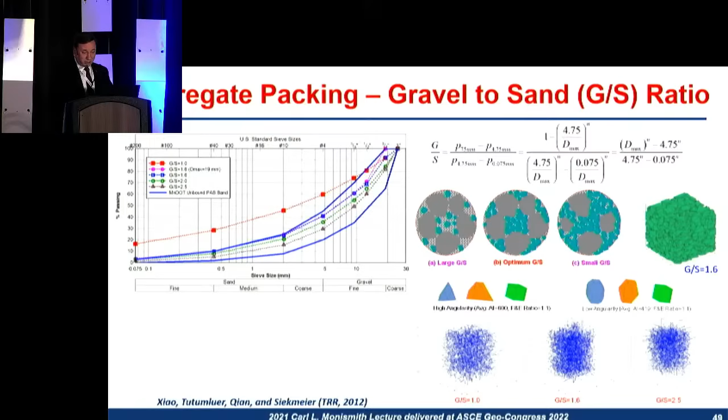And the ratio of the two, we found that has to be such optimum that the secondary sands are supposed to provide support to the primary larger aggregate, coarse aggregate skeleton for carrying the load. Through discrete element modeling work with coordination numbers and porosities, we were able to look at that, and G/S, gravel to sand ratio, was established as 1.6, but typically 1.5 to 2 is where we are actually getting the optimum packing.

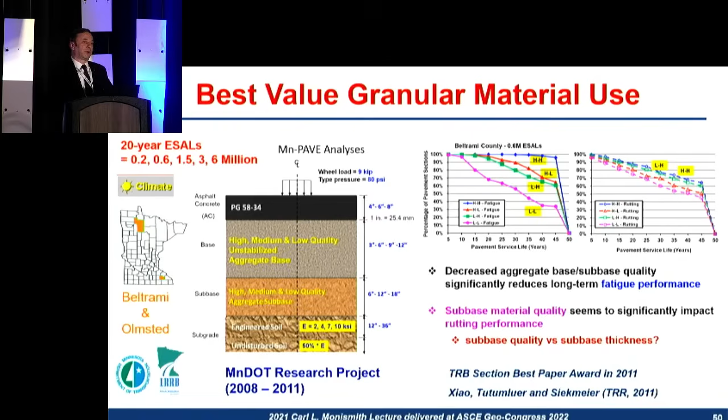But for protecting subgrade and minimizing subgrade rutting, it was interesting through all the mechanistic analyses we did, that sub-base material quality seems to significantly impact the rutting performance. So what you have above your subgrade, that sub-base quality really impacts. What that means to us is that interface between the aggregate layer and the subgrade, there is a really loose contact there. It's not fully bonded at all. That's where the aggregates are spreading under the load, right?

That's where you have to really reinforce, stiffen. That's where you have to place some of our reinforcing, stabilizing geogrids, for example. That's exactly where geosynthetics are needed, for the stiffening effect. This is where Professor Zornberg has been doing a lot of good work, as we have been, and we've collaborated, of course, in those studies.

But lateral restraint is a known mechanism for this. Immobilizing aggregate movement horizontally under a moving wheel load is key, and that is provided by geosynthetics for us, minimizing the lateral displacement. And truly, when you do that, here's a cross-section of a pavement we built back in 2007. By doing dynamic cone penetration testing down to the depth, you can see reinforced versus unreinforced, or stabilized versus unstabilized. When you come exactly close to where the geogrid is, there is the stiffened effect you can pick up by the sheer number of blows getting higher.

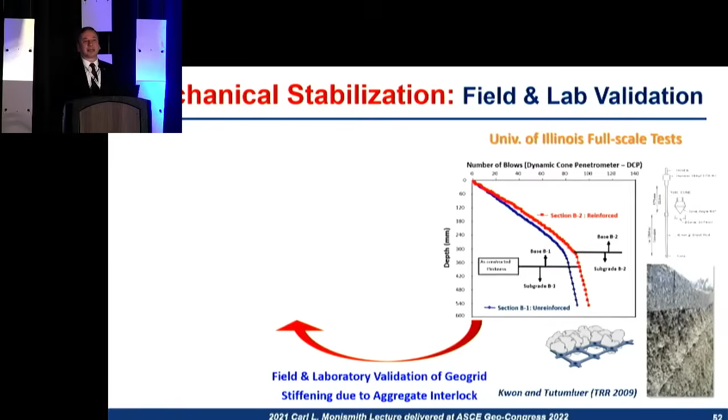So this is something we need to pay more attention to. We need to also pay attention to moisture effects. As I'm coming close to the end of my presentation, I cannot leave without saying moisture is always the bad actor for us. If moisture is not coming into your pavement... but moisture is always going to get into your pavement, and eventually your dynamic loading pavement system will look like that, with the foundation eroding and pumping and all kinds of failures taking place. Again, moisture can come as precipitation infiltration, or capillary rise if you have a shallow groundwater table.

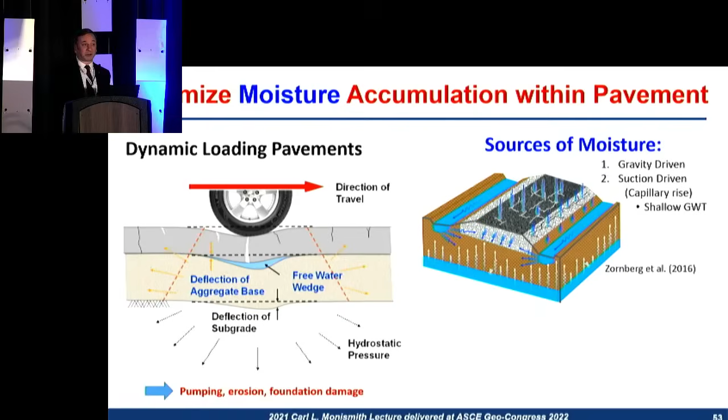These are important conditions. Or it may come all of a sudden as a huge flood for you. Flooding effects, this is terrible. This is Florida in 2017. More and more we're seeing these extreme events. We need to be building pavements that are not going to be eroding completely. Roads are lifelines, so this is where really moisture impacts we need to reduce.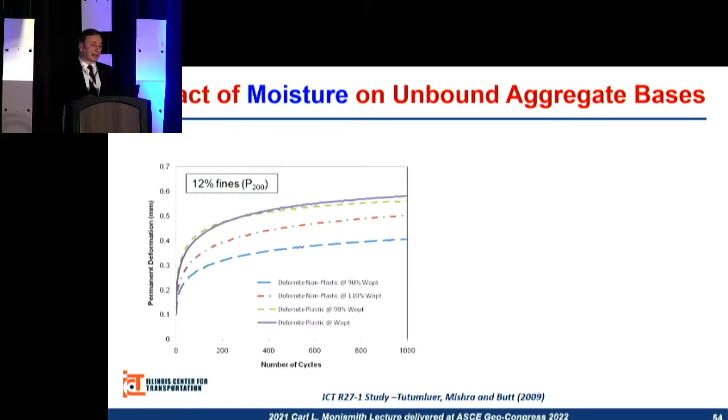This slide just tells you that the worst combination is for moisture effects to take its toll on a granular base. If you have a low quality aggregate, such as high fines gravel, and plastic fines even - and when I say plastic fines, even a PI of 6 is high for these materials - you can have really devastating, high permanent deformations. Moisture ingress, we need to control in design and practice, no doubt.

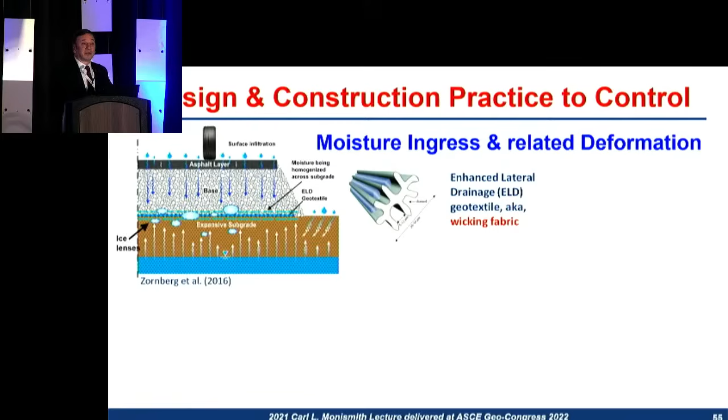Related to that, many people have worked on this, including Dr. Zhang from Missouri, but more recently my good friend Professor Jie Han has been doing very good work in their lab, looking at precipitation-type moisture coming into an aggregate base as well as capillary rise. With the wicking fabric, he clearly showed that permanent deformation can be minimized because it is so effective.

This woven geotextile has lines, exact capillary rise type connected lines, to actually drain the water for you with the same adhesion principle. Another interesting one is volume change potential control where moisture goes to expansive soils.

Expansive soils in your subgrade or base course - you want to minimize the transmission and flow of water, capillary rise. Professor Anand Puppala, another good friend, clearly showed this application in his recent work - you can minimize expansion or expansive potential of a soil by not providing moisture to reach that level. Again, another excellent use of wicking fabric.

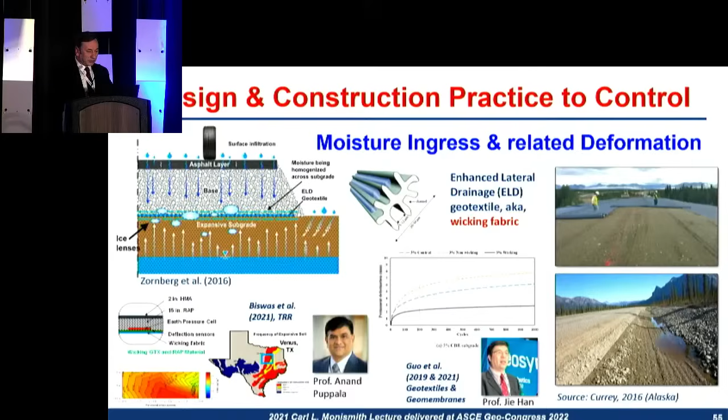One other important thing is aggregate layer intermixing with the subgrade, often with CBR 1 or 2, very low strength subgrades. This is a concern because aggregates are lost into a pumping subgrade. This is something we studied as part of our aggregate subgrade work at the University of Illinois, with and without geotextile.

Clearly, under repeated loading, if you have a soft subgrade, these large rocks are often used to remediate and provide a construction platform. They go as deep as 10 inches into that subgrade. This is a 3-year-old concrete pavement.

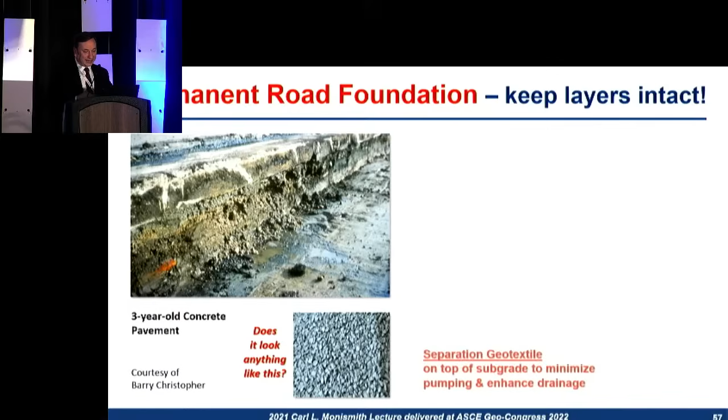Dr. Barry Christopher's excellent slide collection here shows that the aggregate layer doesn't look as good as it did 3 years ago. You know why? Pumping. Again, pumping will happen there. You always need a separation geotextile.

Mark Marienfeld usually calls this the permanent road foundation. I'm a true believer that you need to provide a separation layer between your subgrade, minimizing effects of intermixing. This will really make the road a permanent foundation.

Lastly, on this moisture and drainability topic, there is always an issue about how good of an underlying support layer unbound aggregates can provide to slabs, rigid pavements. The issue is usually the drainage in this case.

But if you go too open-graded with permeable bases, stability is compromised. You need to have a stable, dense enough layer as well as a drainable layer.

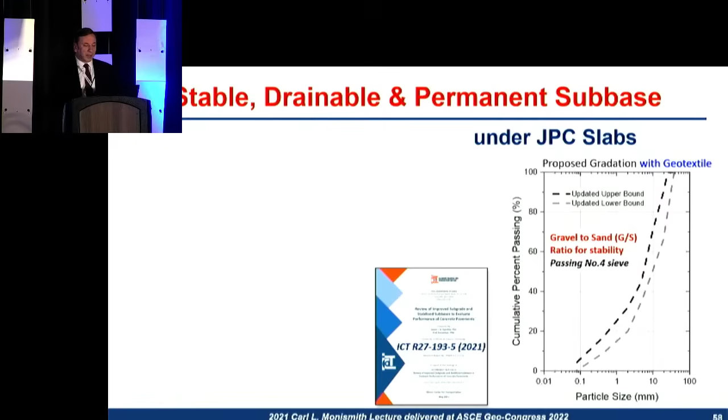How you can do that is what we use - the gravel to sand ratio - as a key in a recent study. We were able to show that you can come up with a very narrow gradation that will actually be stable and drainable, and with the use of a separation geotextile, will be permanent and durable.

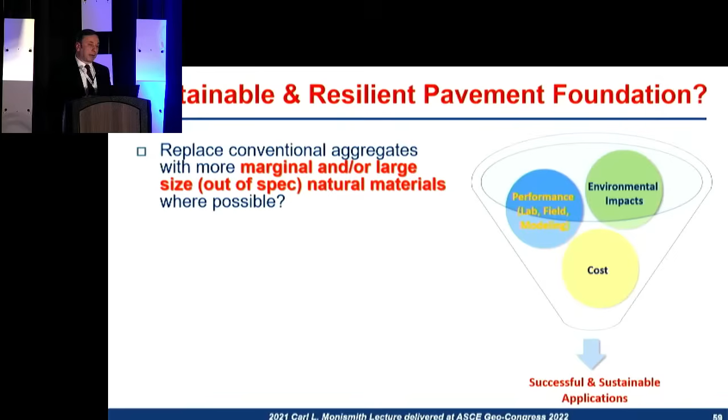Finally, sustainability aspects, as I promised: going more and more to primary crusher type larger rocks. Larger rocks are very, very nicely used, again, on soft subgrade remediation. They are out-of-spec materials, not used as layer materials.

Recycling of old pavements and using them back in pavement construction - some full depth reclamation projects - they all need to go through a certain life cycle analysis, life cycle cost estimate analysis too. We want to make sure your sustainable application will perform in the end.

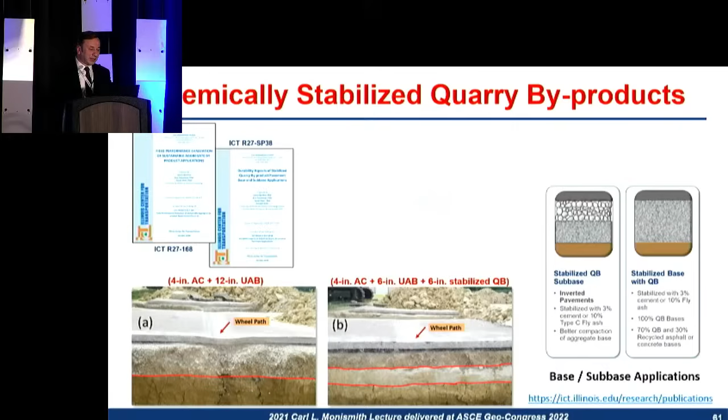Or you can use that same out-of-spec quarry byproduct with cement stabilization or type C fly ash stabilization. We have shown this to be remarkable. With only 3% cement and quarry byproduct sand-sized material, we were able to build bases and sub-bases that lasted so well. The Department of Transportation at Illinois wanted to do a durability study on this - it was so well cementing, especially dolomite material, that we weren't losing any material weight loss in the freeze-thaw test.

Finally, towards the end here, I'm almost done. I know I'm a little bit over. Only 5 slides left. All right, thanks for bearing with me. I have to mention the 800-pound gorilla in the room.

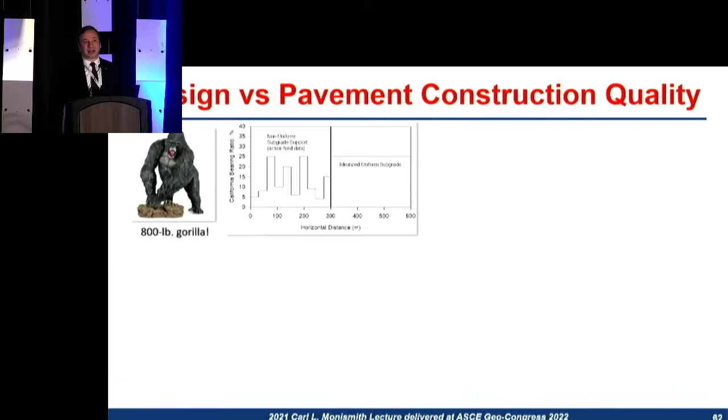This is the disconnect between the design and pavement construction quality. What we assume as one value is never the case. That's why as our designs improve, we need to do a good job in pavement construction. Or as Professor Marshall Thompson, my colleague at Illinois, always says: measure with a micrometer, mark with a grease pen, cut with an axe. This is usually what we do out in the field. But we can do better, and we can do better with some intelligent construction practice.

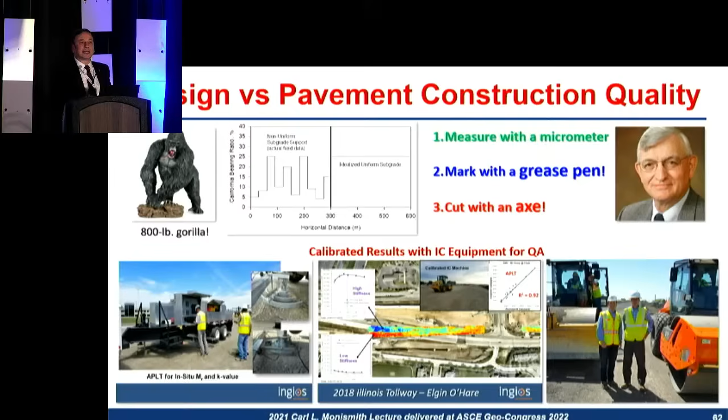Dr. David White, who used to be a professor at Iowa State, developed some techniques that help us go out and calibrate intelligent compaction equipment, as well as perform exact same repeated load triaxial testing in the field on constructed material using his automated plate loading test. I think in the future we need to be doing more of this as intelligent compaction comes into our practice.

What is also in the future, with intelligent construction, is that we need to do more smart sensing of these aggregate materials and how they perform. One of my students in the audience, Professor Hai Huang, who came from Penn State, worked with us on this application.

This is a smart rock, one of his innovations. The outside shell is 3D printed, but inside there are 22-millimeter triaxial accelerometers, gyroscopes, as well as pressure cells and pressure-reading material with temperature sensing. When you bury this during construction, you can clearly see under a vibratory compactor how, in the vertical and two horizontal directions, the movement of the roller can be felt. It's not just horizontal movement - the blue lines on the side show that there's actually a lot of rotation, which was picked up in that study as well.

This study was actually a unique one. We collaborated with the Army Corps of Engineers Engineer Research and Development Center on the Smart Runway project, which was at the Hill Air Force Base. That helped us install a bender element sensor - a field sensor to measure modulus throughout the lifetime of the pavement. We installed the same thing at the FAA's facility on a first-time constructed and tested geogrid-stabilized base course section, to again pick up the modulus improvement. These are the things that are coming as smart sensing in our construction practice.

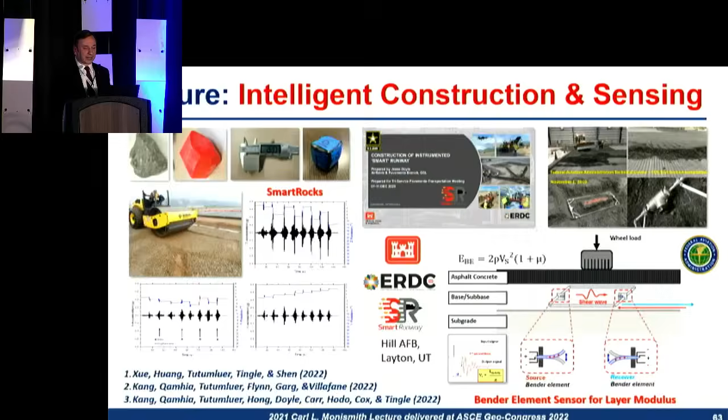This is truly the last slide I will show before my acknowledgments. I'd like to end my talk, thanking you again for bearing with me, by mentioning that all these innovations can come together, and this is a true representation and demonstration of that.

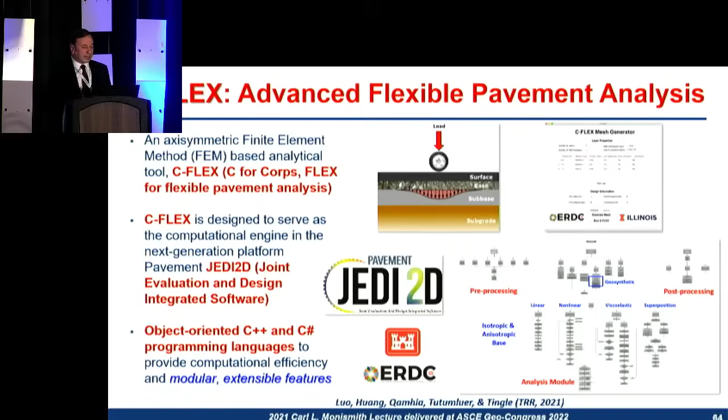The Army Corps of Engineers has come up with CFlex, their new Advanced Flexible Pavement Analysis program, and I've been lucky to work with them, building computational engines into their next-generation Pavement JEDI 2D - Joint Evaluation and Design Integrated Software. The good news is that in CFlex, which uses object-oriented programming with modular and extensible features, we were able to bring in options for isotropic and anisotropic characterization of linear or nonlinear stress dependency, as well as a geosynthetics module and superposition aspects of multiple wheel-load superposition, which works even in the nonlinear case - you get good conservative results when running an axisymmetric solution. This is the type of analysis we need to be incorporating going forward. I'm really proud of that work.

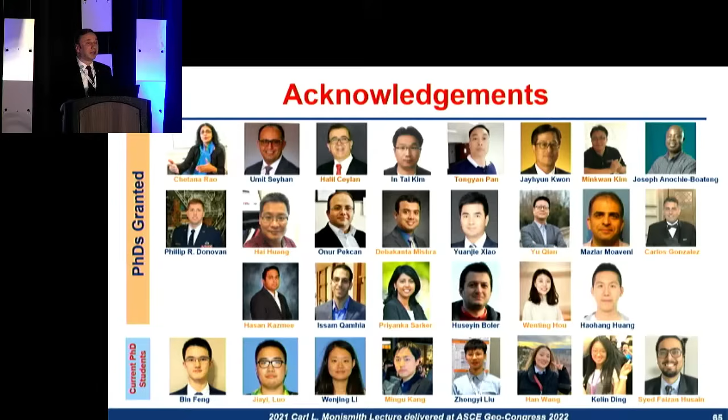As I conclude my talk, I owe a debt of gratitude, to say the least, to these brilliant faces you see - many of my PhD students who actually did the work I presented to you, 25 years of work on granular materials. Many of them are in the room today, especially the current PhD students in the bottom row. They all drove over here just to enjoy the moment, and I truly appreciate all of you contributing to the years of work I've talked about today. Without them, it wouldn't be possible.